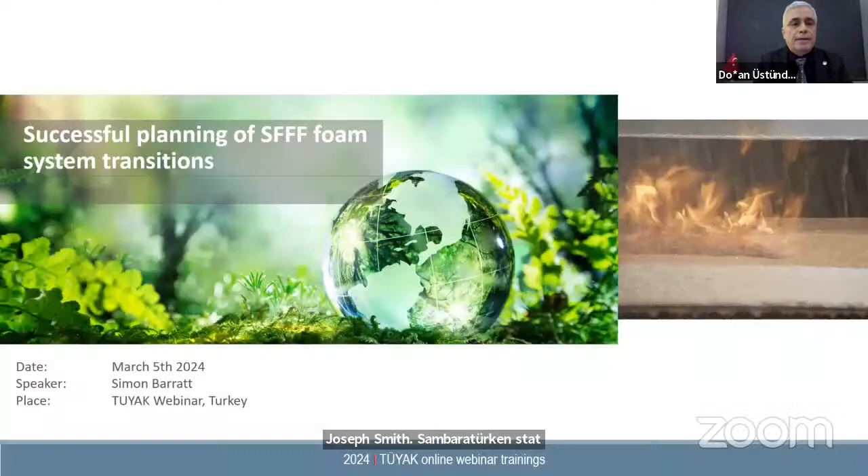Okay, thank you. Good afternoon, everybody. It's good to be here to speak to you today. For those of you at the TUYAK conference in November, I spoke in more detail about the background to legislation and PFAS and chemistry.

What I want to do today is move the topic forward a little by talking about how we actually transition systems from fluorinated foam products to fluorine-free. So we're going to have a quick refresher on foam systems, a quick refresher on the background to the PFAS issue, and then we're going to move on to the bulk of the presentation, looking at different components and considerations when transitioning our foam systems.

As a reminder, we're typically using firefighting foam in systems where we protect against the fire and spread of ignitable liquids. Today's presentation will be all about fixed fire protection, so that's pipework, valves, fully installed, as opposed to mobile firefighting with fire brigades.

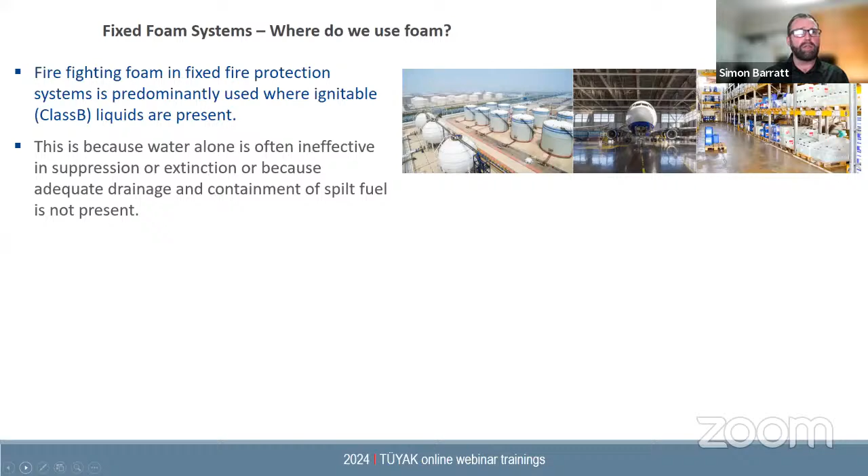We're going to use foam because often water alone is not effective in the protection of these ignitable liquids. Or it might be that we can use less water, less density, by enhancing that water supply with foam. Foam systems are also used where there's no possibility to provide adequate drainage or containment of spilt fuels.

So here is our typical fixed system. We will see this diagram a lot today, with all the different elements of our fire protection system. We will have a water supply, like with a standard deluge or sprinkler system. We then have a foam concentrate reserve, a mixing device which is the proportioner, which mixes water and foam concentrate in a certain ratio to give us a foam solution, which is then distributed throughout the fire protection network to different risks - loading areas, large storage tanks, shelving in a warehouse situation, or storage of ignitable liquids in barrels, for example.

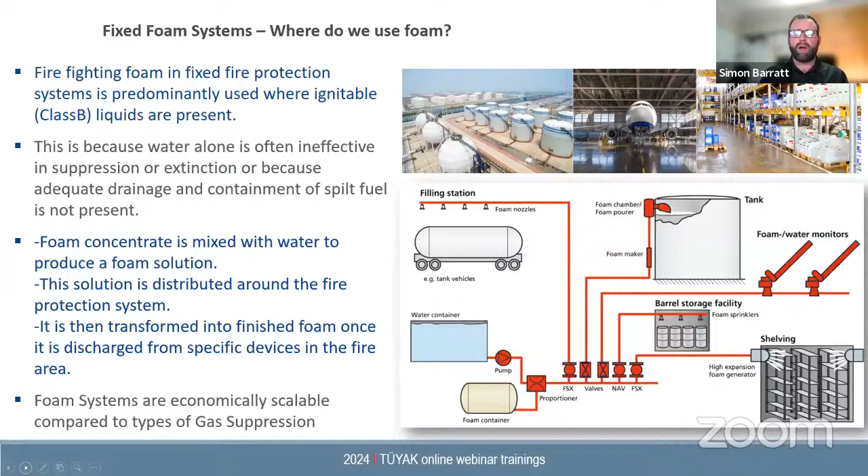One of the benefits of a foam system is that it's quite economically scalable. What I mean by that is we can protect large areas with a foam system without it becoming very cost prohibitive.

Although the foam concentrate itself is a chemical, the fire extinguishing mechanism is purely physical. What we want to do is take away the fuel from that fire triangle. When we have a Class B ignitable liquid fire, it's actually the vapors escaping from the liquid that's on fire, not the liquid itself. So we use the foam as a physical blanket that floats on the surface of these ignitable liquids to stop the vapors from escaping, and thereby we remove the fuel from the fire.

We also have a cooling effect coming from the foam solution, the water temperature. That helps to cool down steel containment that may later give us issues with the foam blanket.

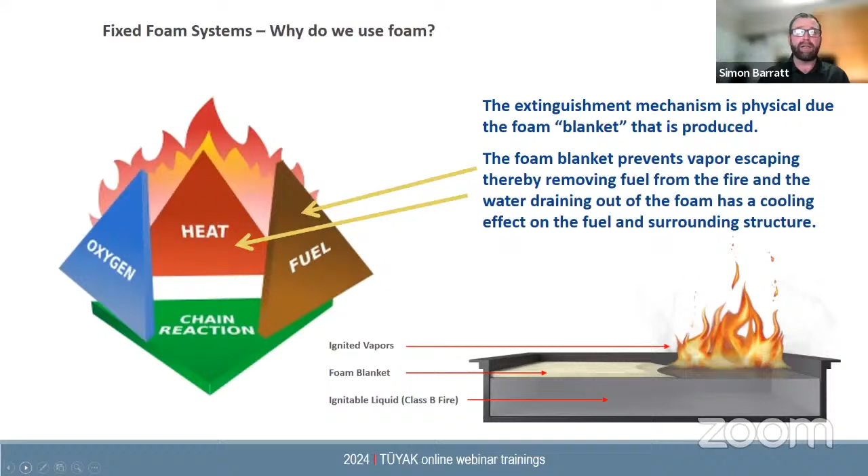So next, a very short video just showing that actual scenario. Here we're discharging foam during an approvals test with a laboratory, and due to the surface tension and the specific gravity of the foam, that is going to float on top of the ignitable liquid. You can see where we've got a foam blanket, we've stopped the vapors from escaping, so we get fire extinguishment.

That was just a very quick background to the main areas where we're using foam, just to set the tone for this presentation. So next, PFAS.

What about the PFAS issue? PFAS is a group of chemicals - per- and polyfluoroalkyl substances. That's a group of thousands of different chemicals used in various types of industry to enhance the performance of a certain product. For example, PFAS are used in food packaging to stop oils and greases escaping, like with a burger wrapper, or in stain-resistant clothing or furniture.

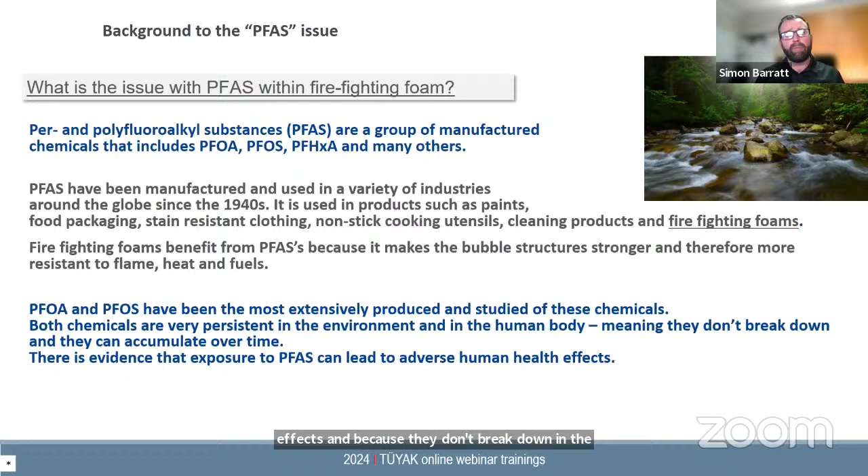These types of PFAS used in foam include PFOA and PFOS. They have been linked with detrimental health effects, and because they don't break down in the atmosphere, they're not biodegradable. They last in the environment for a very long time and are also referred to as forever chemicals. As the planet gets more sustainable and environmentally conscious, we don't want to be using these chemicals anymore.

That's why legislation is increasing. However, we still need to extinguish fires, so we're now working with and developing foams without these PFAS chemicals, called fluorine-free foams, because they don't have this negative environmental impact.

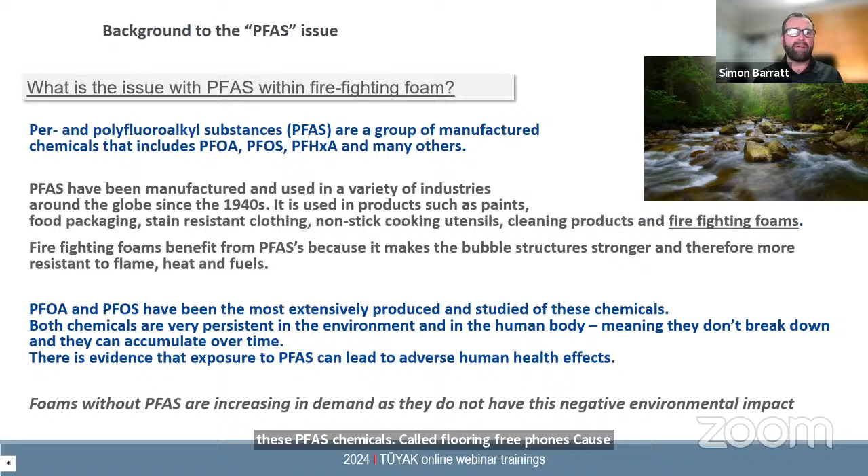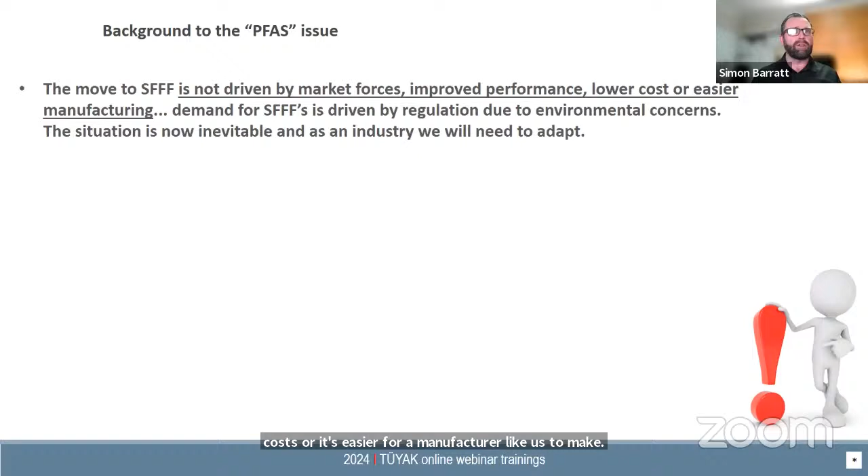This move to SFFFs is not driven by the usual market forces in terms of improved performance, lower costs, or it being easier for a manufacturer like us to make. The reason we make these changes is due to environmental concerns and increasing regulation around the world. I want to make the point that even fluorine-free foams cannot be considered environmentally friendly because they do have an impact on the environment. The key thing to remember is this is a short-term environmental impact rather than a long-term one.

We see different acronyms or references for SFFFs - F3, FFF, fluorine-free, PFAS-free. Whenever you see these marketing words, it all effectively means the same thing: a foam concentrate manufactured without added PFAS chemicals.

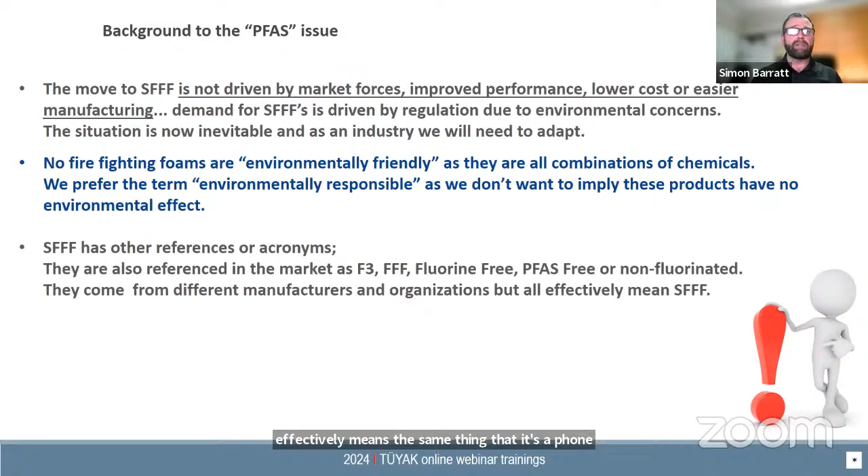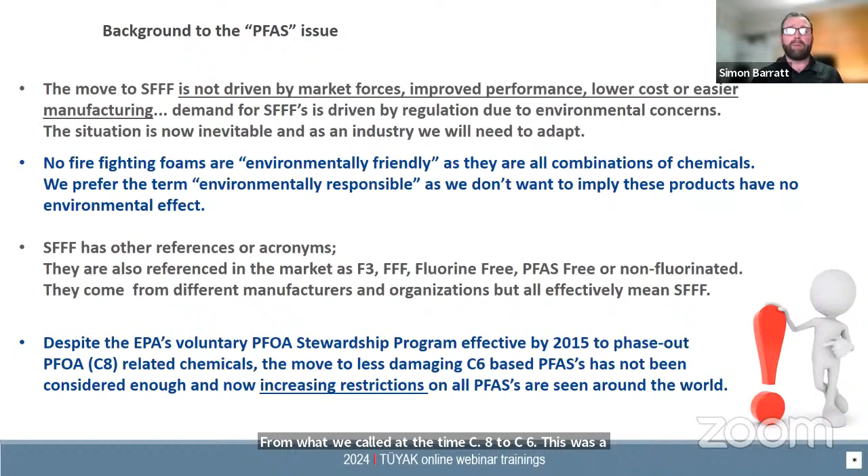For those of you involved in foam systems, you may recall that over the past 10 years the industry already moved types of foam from what we called C8 to C6. This was, if you like, a cleaner type of PFAS, but due to increasing restrictions, even this cleaner type is not considered acceptable anymore. So we've got new systems and modification of existing systems with SFFF, and that's increasing as new legislation comes into play.

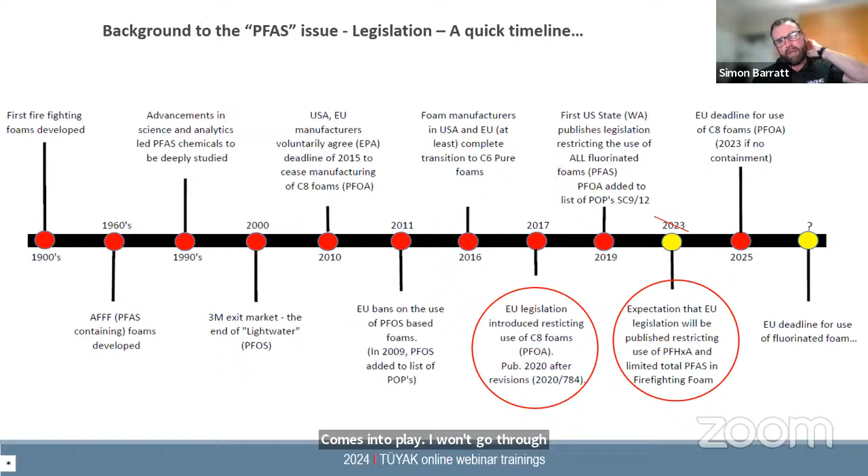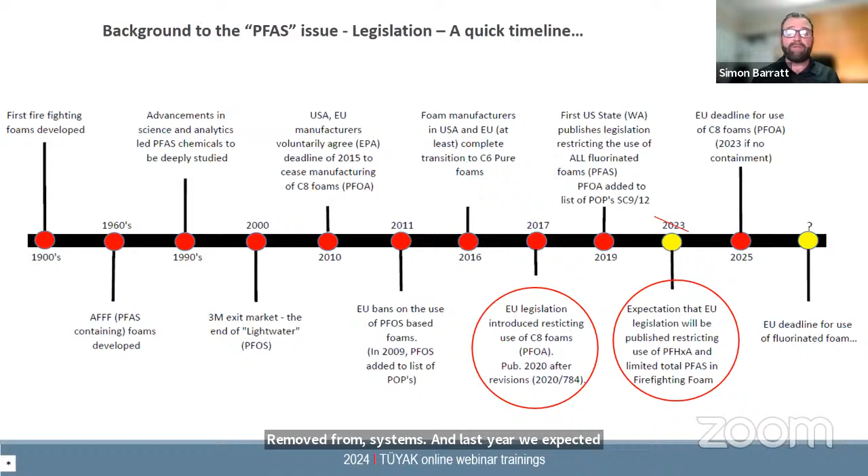I won't go through this long timeline of foam, but the two key elements for us in Europe are the EU's legislation, firstly on C8 foam, which is now live. From January 2023, it could no longer be used if it couldn't be contained, meaning not sold, not used, and it should have been removed from systems. Last year we expected new legislation for PFAS in all firefighting foams, but that's been delayed due to public consultation. We expect that sometime in 2024, with around a 5-year derogation for industry to comply and stop using those types of foam concentrates.

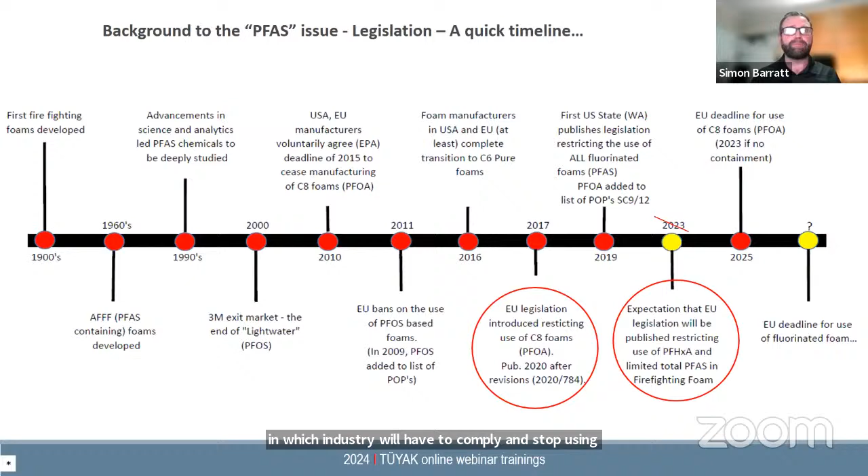So that's the basics on how foam is working, and why we need to change foam. Once we've decided to change our foam system, or to design and install a new foam system with SFFF, synthetic fluorine-free foam, there are several different elements to consider. If it's a new system, it's relatively straightforward - similar to designing a system with fluorinated foams from the past. So we're going to select a design standard.

We're then going to select a product supplier or suppliers. We would then design that system according to the supplier's product densities, approvals, and of course the design standard. And then we're going ahead and installing the new system. I know for the contractors on the webinar today, that's still a very complicated and time-consuming process. But because we have effectively a clean sheet of paper, it's much more straightforward and standard.

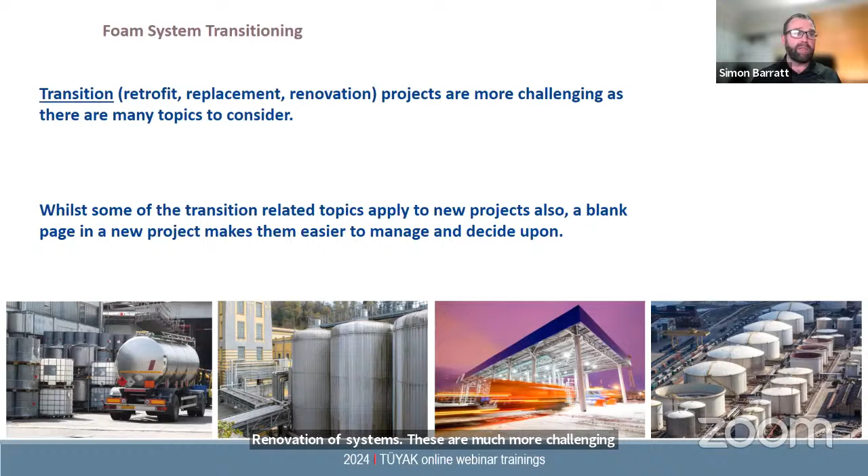A lot of this is what I call an unbudgeted cost. So when the end user installed their fire protection system 5, 10, 15 years ago, they didn't really expect to have to replace it again in the future. So this is often a surprise to end users about actually how many different topics we need to assess. It's not just a case of emptying the tank with one foam and refilling it with fluorine-free foam.

So when we start working with industry, with insurers, with end users, there's some key questions that we like to ask and understand. So shall the transition comply with a specific design standard? I think this is the most important one because our advice has got to be based on that particular design standard. If there's no design standard, I would suggest that's probably a bad idea.

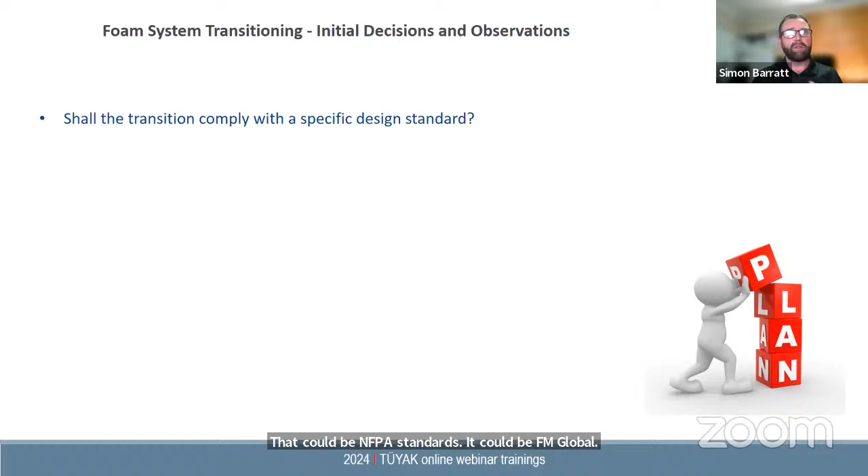And at that stage, a design standard should be adopted. That could be NFPA standards, it could be FM Global risk occupancy standards, or it could be the European standard, for example, or there may be local standards over and above those more international standards.

Is there an insurer or AHJ involved that will have their own requirements? So what we've seen over the past few years is that insurance companies are getting much more involved in requiring their clients to change these systems.

But for example, if an end user discharges a system that's got non-compliant or illegal foam concentrate in it, obviously that could be a risk for the insurance company as well. So we do see insurers involved more and more.

Will the transition use system components tested and certificated together? Well, if you are designing to an NFPA standard, for example, that's a prerequisite that you must use listed or approved equipment that's been fire tested.

Even the European standard will have more requirements related to products tested together. So this is a key one to understand. The reason we ask this question is it will give you a more compliant system, but it will limit the choice and it may increase costs. So at the early stage, we need to understand if this is a requirement of the end user or the insurer.

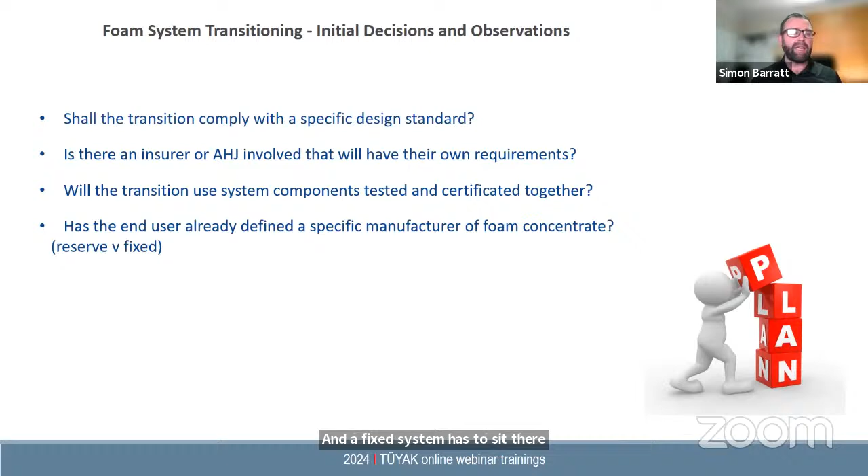But of course, from my point of view, I think there's something very different between a fire brigade and a fixed system. And a fixed system has to sit there and work without any human intervention in case of a fire. So for that reason, it doesn't automatically mean that the foam that works well on the fire truck will also work well in a fixed system.

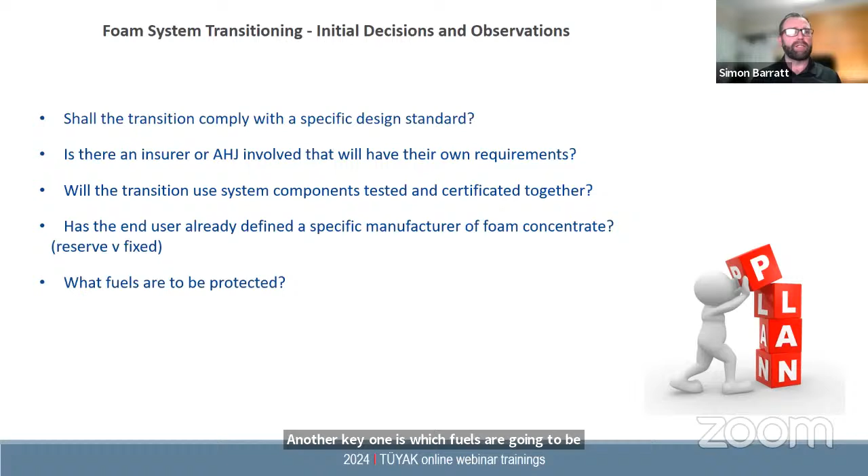Another key one is which fuels are going to be protected. What's the commodity? And we're going to come back onto fuels more later.

One difficulty, I would say, or one question everybody asks, and it's very difficult to give an answer, is should all traces of PFAS be eliminated from the system? If that's the case, and the legislation or the proposed legislation in Europe is unclear on this, and it's very difficult to get a definitive answer.

But if during your transition you don't want to risk any future issues with trace elements of PFAS, then a suitable cleaning or even a partial replacement of pipework might also be required. This is quite a complicated area, and we won't go into that today, the cleaning of systems.

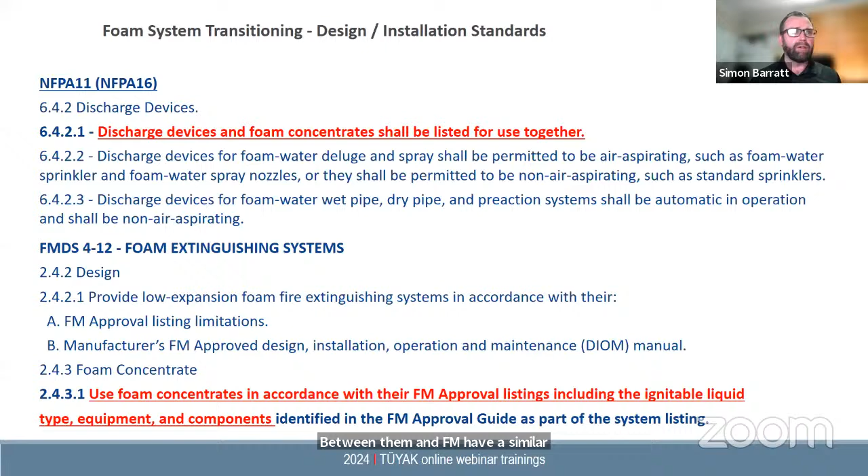Here, quickly in red, we've just got, I mentioned earlier, NFPA 11, for example, the foam standard requires the use of devices and foam concentrates that have been tested together in fire tests, but also compatibility tests between them. And FM have a similar requirement in all of their design standards as well.

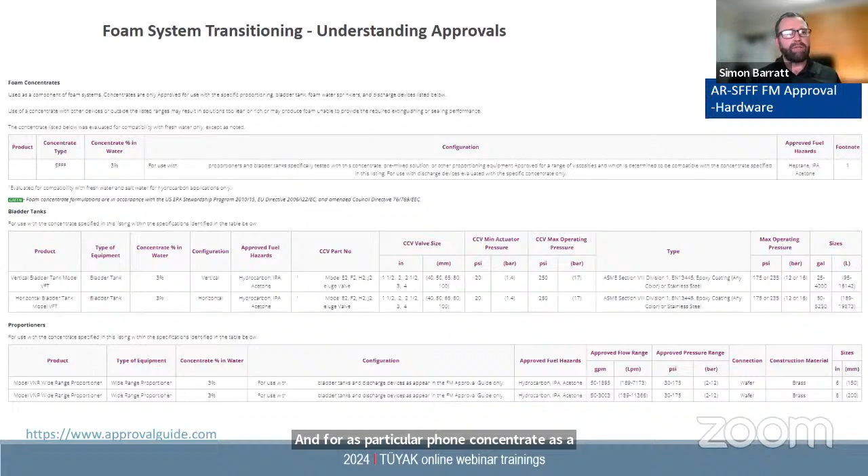This is a slide that often people do not know exists, so I'll take a minute to explain. This is a typical manufacturer's approval, actually an FM approval, for a particular foam concentrate. As a manufacturer, we need to test different proportioning systems and different discharge devices at specified densities. On the FM website and UL's website, you can look up a specific foam concentrate and see all the different pieces of hardware that are approved. Importantly, you'll also see design information there. There's a lot of information in these online approvals, and both FM and UL are free of charge to access.

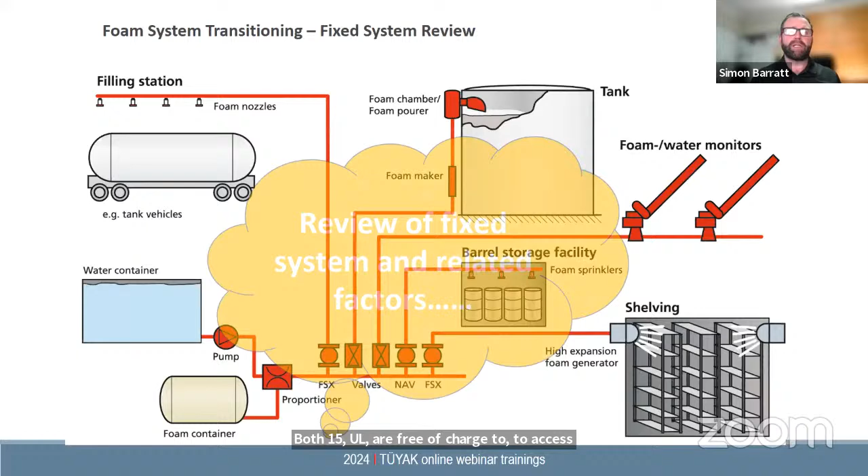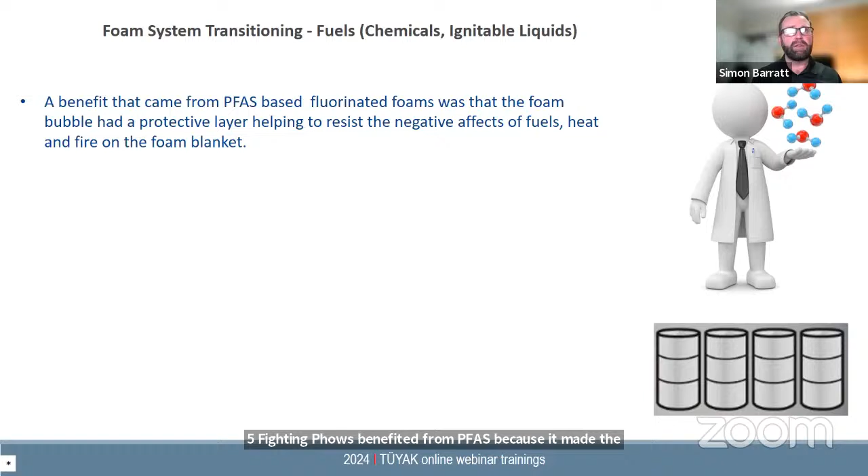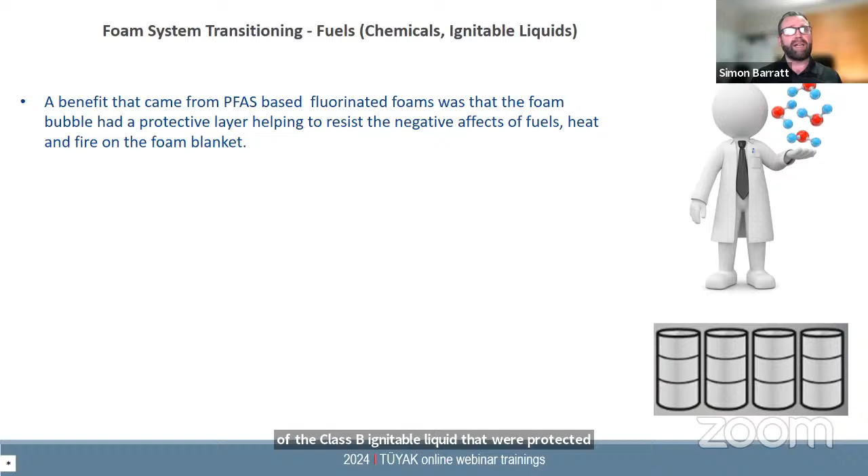Coming back to our system, we're going to go around different parts and focus on individual products and scenarios. I mentioned I would come back to fuels. In my introduction, I explained that firefighting foams benefited from PFAS because it made the bubble structure more resistant and more resilient to heat from the fire and flames, but also to the actual chemical reaction of the Class B ignitable liquid we're protecting. PFAS helped us a lot with that in the past. But with the removal of PFAS, we've had to find other ingredients to maintain fire performance. I have to say that probably 5-6 years ago, there was a difference in fire performance between fluorinated and fluorine-free foams. But now we are seeing products on the market giving very similar performance and passing the same tests that were passed with fluorinated foams in the past.

However, some fuels - and MEK, methyl ethyl ketone, is one of them - are used in a lot of industries for cleaning surfaces before production. It dissolves and destroys resins, adhesives, rubbers, and it also has a destructive effect on firefighting foams as well.

What we had with fluorinated foams was a long history of proven performance and extrapolation, meaning we had data for one scenario that we could use in another scenario with a certain amount of confidence. What we've learned as an industry - and I don't just speak from my company's point of view - is that we shouldn't automatically assume what worked in the past will work in the future. Therefore, there's an unprecedented amount of fire testing happening within our industry from many manufacturers that never happened in the past.

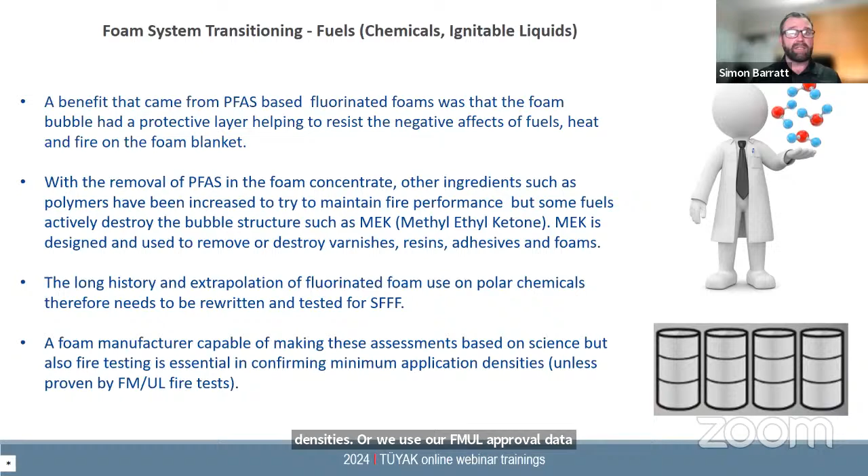I think one of the key things, if you're involved in transitioning a system or if you're a contractor advising your client, is that it's important to work with a foam concentrate manufacturer capable of not only making these assessments based on science, but also backing that up with fire test data. Because what we see is that science tells us one thing and a fire test can tell us something else. So it's a combined picture that we use to give guidance on minimum application densities, or we use our FM/UL approval data to give that density information.

As I said, these SFFs are more sensitive to fuels than in the past, and this is not manufacturer specific. It's happening across many different manufacturers because they've all taken away those fluorinated surfactants without finding a direct replacement that's biodegradable and more environmentally conscious.

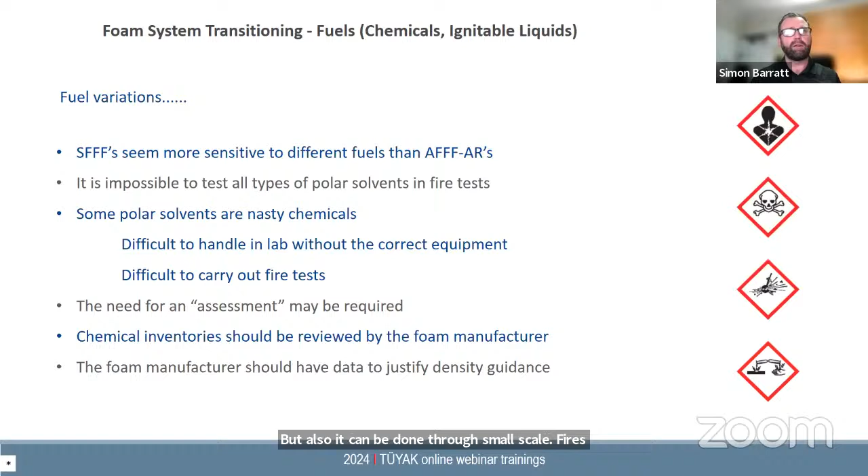So that means we need to ensure we've got a way of performing some kind of test on these chemicals, but some of them cannot be handled outside a laboratory. Some of them we just cannot fire test because they're too dangerous - fire test centers won't allow fires with those products. So we need to find other ways of making an assessment. That can be done through chemical science assessments and evaluations, but also through small scale fires or small scale compatibility tests with the foam.

I'm not going to go through this in detail, but the top slides show a typical fluorine-free foam, SFFF, on MEK. What we're doing here is testing compatibility. This does not by any means replace a fire test, but we're making up a foam solution, shaking it in the beaker you can see in the first slide, and applying that foam blanket. You can see that after 19 seconds, the foam blanket has started to disappear, and this is even without fire. We then apply a second shot of foam after 25 seconds, and by 80 seconds, that has disappeared again. So that particular chemical is designed to destroy the gums and polymers which we happen to use in firefighting foams.

When we look back on a fluorinated foam, you can see at the bottom the timings are quite different. As an equivalent test, we stopped the test at 60 minutes because it was just getting boring. You can see on MEK that foam blanket is still very much intact.

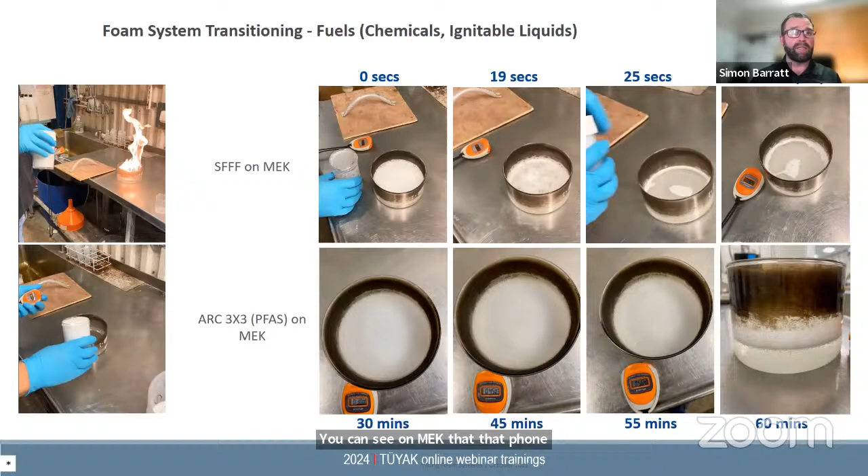Now, what I want to conclude with this is not that SFFs don't work. It's that we need to understand where they're strong and where they're weak. And that only comes through testing.

These problems can be overcome, normally through density. So we just need to increase the density of the foam application to counteract that foam destruction in order to get extinguishment during a fire. It may be that we mix at 6% instead of 3%, so we're using twice the concentrate. That doesn't always work, by the way, so again, lots of research and testing is required here.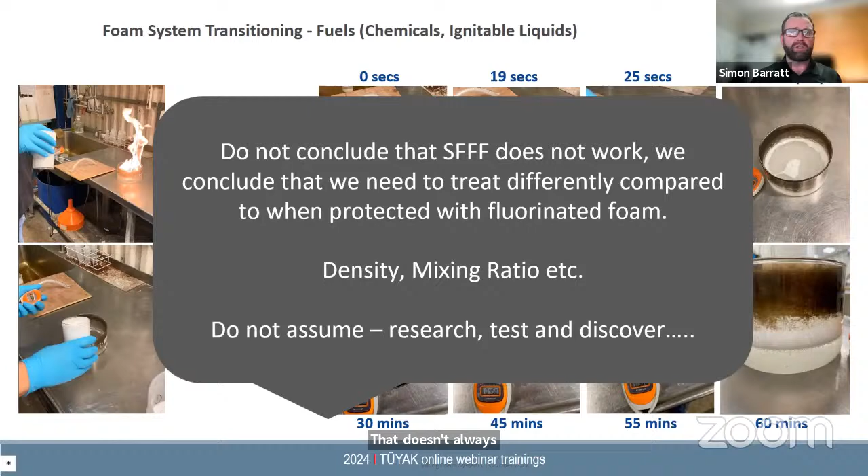Moving on from the fuel, next the discussion normally comes to the foam concentrate. And again, we've got many things to consider. What kind of system is it? Is it fixed or is it a mobile system? What's the fuel? What type of discharge device do we have? In our foam industry, we have a mixture of devices that are made specifically for foam discharge in mind, and then we have products that are not specifically made for foam. They're more designed for water application, but used in foam systems, like a monitor or like a non-aspirated standard sprinkler head.

How will that foam be proportioned? Do we have a proportioning system that's capable of dealing with that foam? Do we need an approval or certification on the foam? Hopefully, yes, but sometimes that's not a requirement. What design density do we need to apply for that foam as per the design density guidelines?

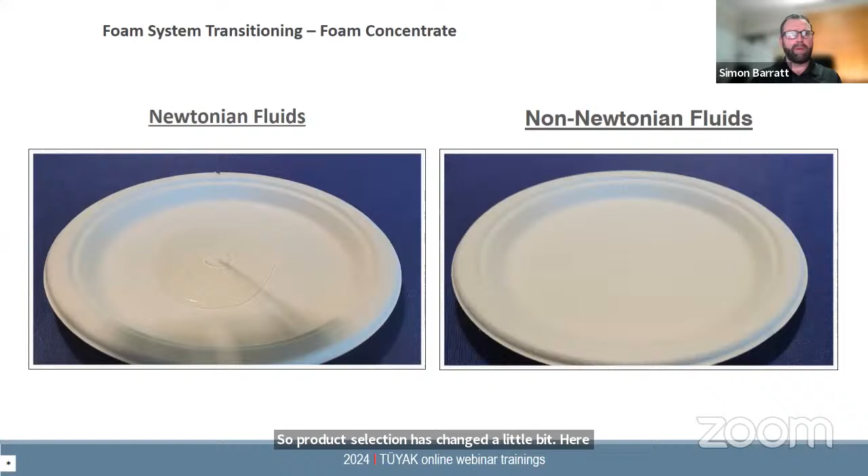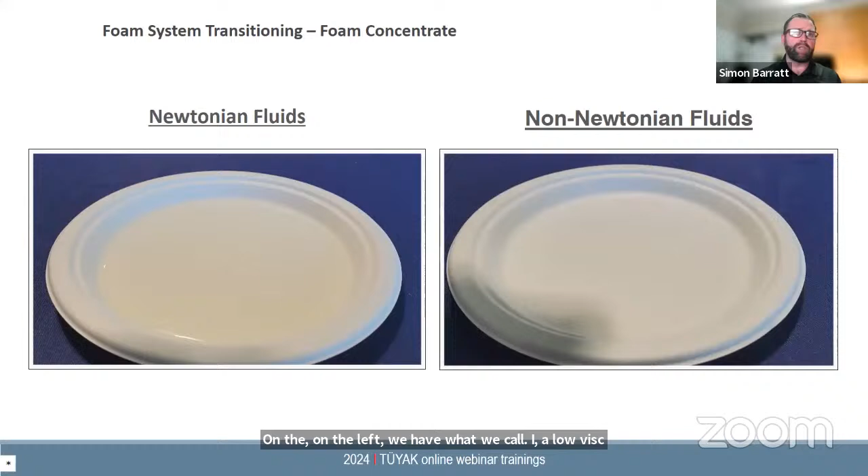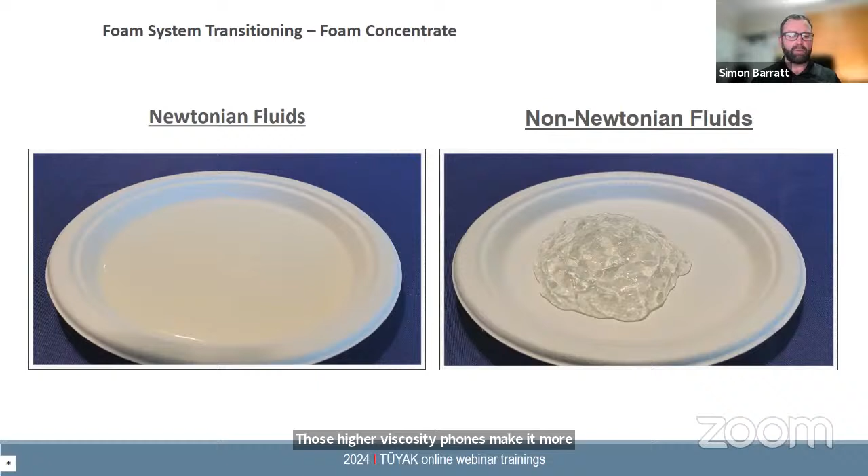Here we've got just an example of what I mentioned about viscosity. On the left, we have what we call a low viscosity or Newtonian type fluid. That was what our traditional AFFFs look like. And then on the right-hand side, there we've got the fluorine-free foam, also called non-Newtonian, which you can see is a much higher viscosity, much thicker. And the reason that's relevant is the proportioning system we use. Those higher viscosity foams make it more challenging, and that's why we need to ask several questions during a transition project.

So moving on from the foam concentrate, we then look at the foam concentrate storage tanks. So this is an atmospheric storage tank, normally used in foam pump eductor systems, or if there's a water-driven proportioning pump, these atmospheric tanks are what's required.

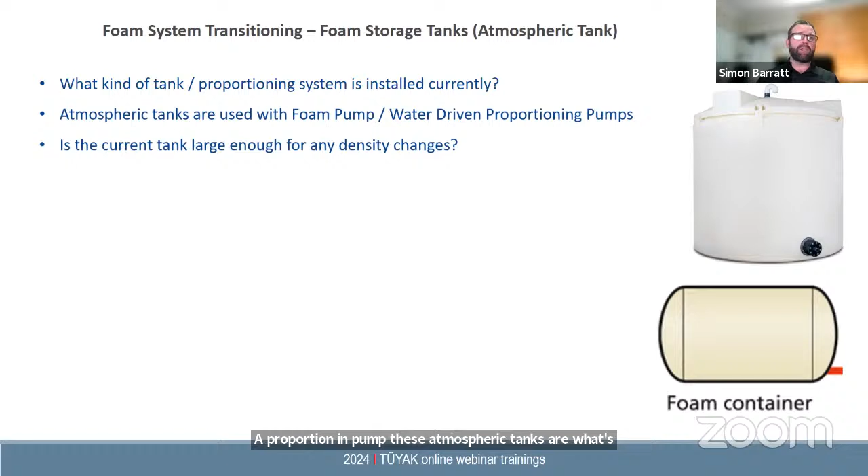If there's been a change in the density, moving from a fluorinated to a fluorine-free, then that tank, you probably can't reuse it because you need a bigger tank anyway. Just as a side issue, I spoke about density changes.

What we're seeing is we're consulting and involved in quite a few projects where the original design was not correct. So there is an increase in density, but it's because the original design was not correct, rather than the products today need more density. So it's not always the change of foam that needs it. It's due to either bad design in the past, or maybe FM or NFPA have increased the densities in the latest revision of their design standards. So there's more than one reason why densities can change.

If the tank is large enough, however, it might be worth assessing if it's kept or not, because what we don't want to do is take a storage tank that had fluorinated foam in, empty it, and then refill with fluorine-free foam, because you will contaminate that fluorine-free foam straight away. So having spent that money on the new foam, that's not so much of a good idea.

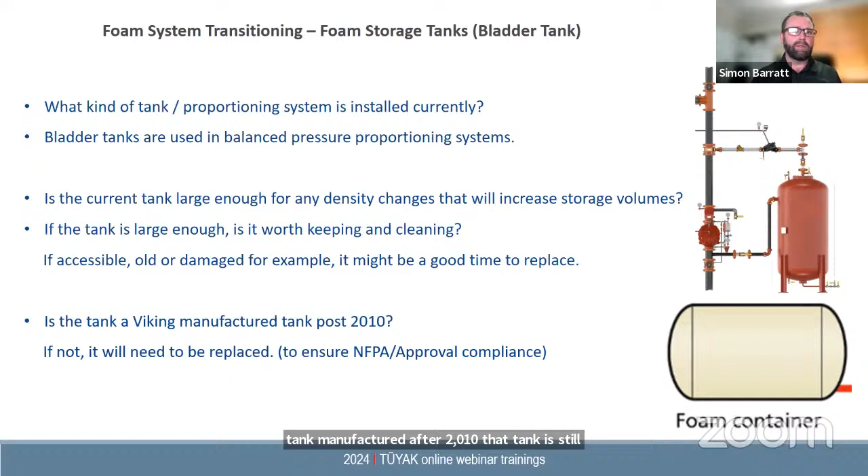It will dose at a certain percentage within the design parameters of that device. So again, if the density doesn't change as part of the transition, then the tank could be reused. If it's accessible, old, or damaged, for example, it could also be a good time to replace it. Speaking from my company's point of view, if it's a tank manufactured after 2010, that tank is still covered under our new fluorine-free approval.

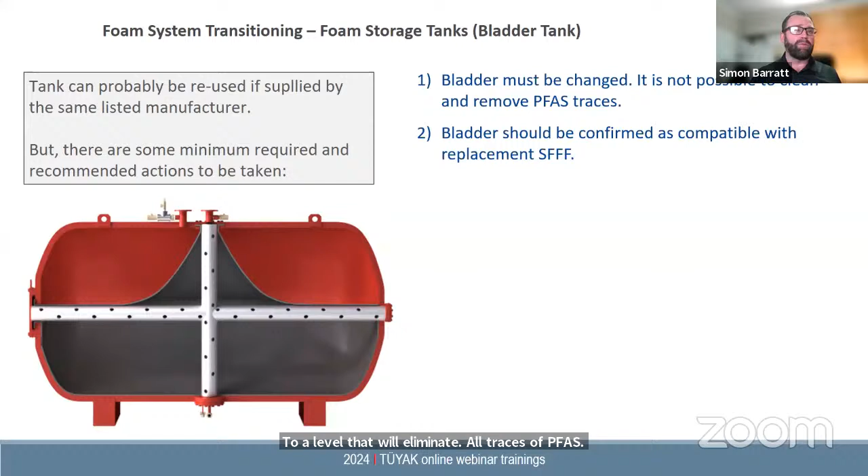So if the density is the same, there is the possibility to reuse the tank. However, what we would require is that the bladder must be changed. There's just no way of cleaning that rubber bladder inside the tank to a level that will eliminate all traces of PFAS. The bladder should be confirmed as compatible with that foam. Again, that's what you get when you select a UL or FM approval. As a manufacturer, we have to pass long-term stability tests between the foam concentrate and the bladder.

Those internal tubes might need to be changed if the end user or the AHJ requires a fully PFAS-free system. Again, any part of the tank that's in contact with the concentrate, so the outlet flanges as well, if they cannot be suitably cleaned, then they would need to be replaced. So you start to see that if it's quite an old tank, it's just going to be easier and probably more cost effective to replace the tank.

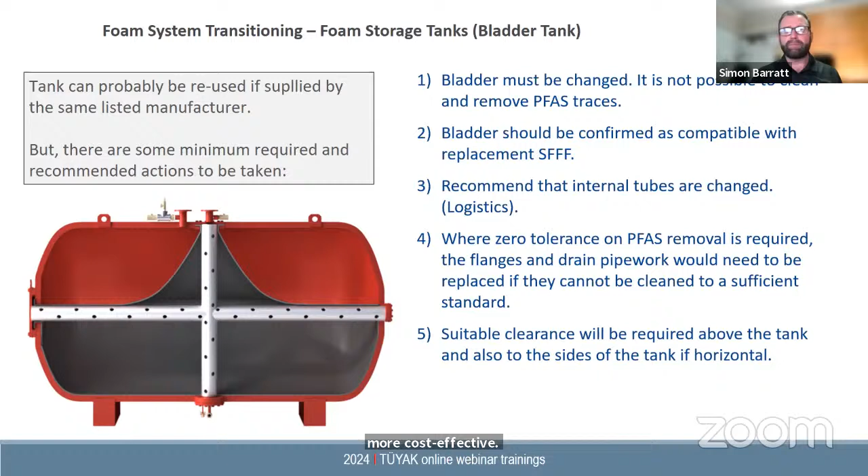Clearances will be required to work on the tank to remove those tubes. So again, if that's not possible, that's where the replacement of the tank might be required.

Moving from the tank to the pipework, because all FM UL system foams are currently higher viscosity. And remember, in the past, an alcohol-resistant AFFF was also higher viscosity, so this is nothing new, but now all foams are higher viscosity in these FM UL systems. I showed you the video earlier of the foam very thick, moving very slowly. That's because it needs to move through this pipework.

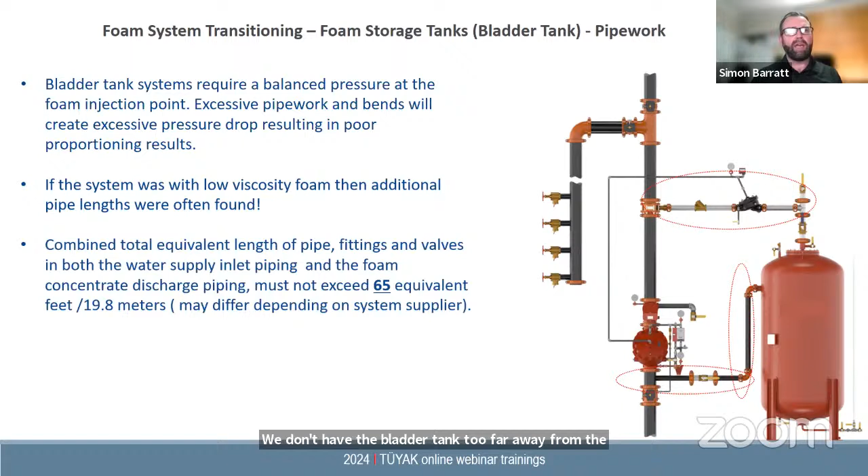So what we need to ensure is that we don't have the bladder tank too far away from the proportioning device. In our technical data page, and it's similar to other manufacturers, we don't want more than 65 equivalent feet or 20 meters equivalent feet of that pipework that's circled. So the pipe to the tank containing water, and then the pipe running away from the tank to the proportioner, that needs to be less than 20 meters.

We state 20 meters because that's what we tested in our FM approval. However, we are running R&D to see if we can increase that recommended distance in the future.

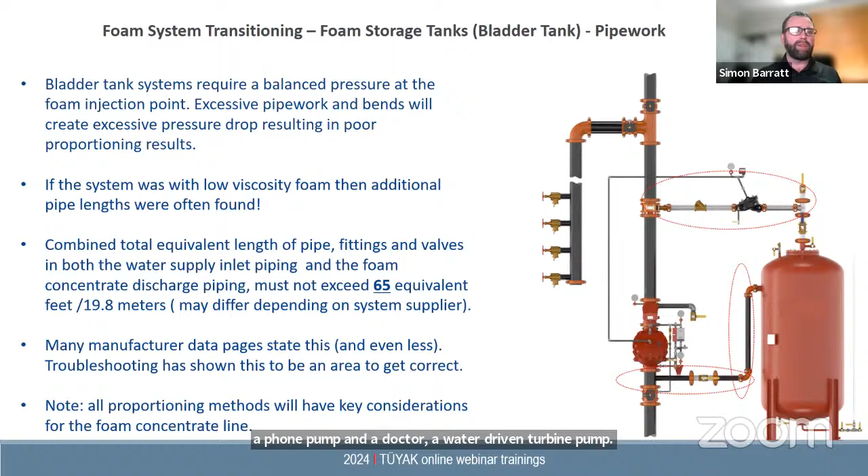One point I would like to make is that all proportioning systems have a critical thing to address: the pipe from the tank to the proportioning device, whether it's a foam pump, an eductor, or a water-driven turbine pump. They all will suffer with excessive pressure loss in that pipe section.

So looking at these different types of proportioners, we would always need to change the proportioner. We can't modify these devices in the field. So at the minimum, a new proportioner would be required. It might be that we go from a standard ratio controller, shown at the top there, to a wide range proportioner to help manage the higher viscosity foams.

Again, that's the kind of advice and guidance that we can give, but it's a reality. In any case, the proportioner would need to be changed to be compliant with design standards and most insurers' requirements. We'd need to check if the density changes, then if we've got a higher flow rate, is the size of the riser still adequate as well? So there might be some pipework changes required there.

Again, looking at a typical water-driven pump, when we're involved in the transition of these, we need things like serial number. We need very detailed suction line detail. We need to know the minimum and maximum flow rates and the foam concentrate that's intended for use. And then we work with manufacturers of these products to decide whether the existing unit is suitable, if it can be cleaned and made suitable for the new foam, or if a replacement unit is required.

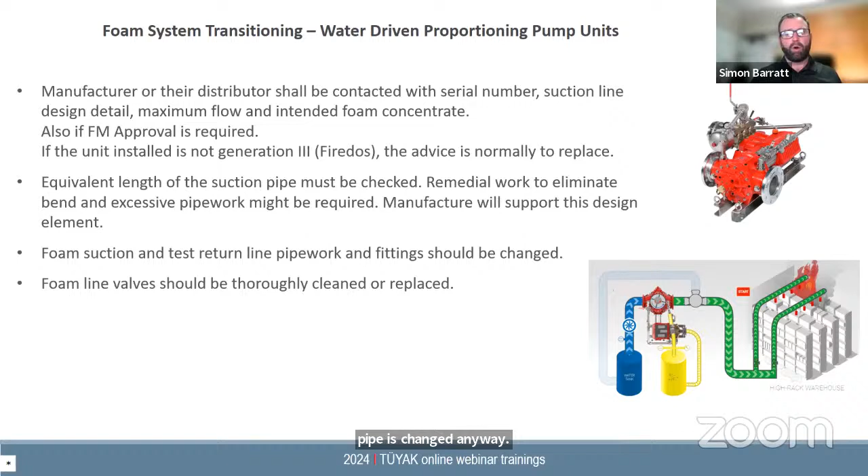The suction pipework and return pipework should be changed. It's contained concentrated PFAS foam for several years, so we would always recommend that the pipe is changed. The valves should also be replaced, or if they can be thoroughly cleaned to eliminate traces of PFAS, then that could be possible. Again, cleaning is probably more expensive than replacing the valve.

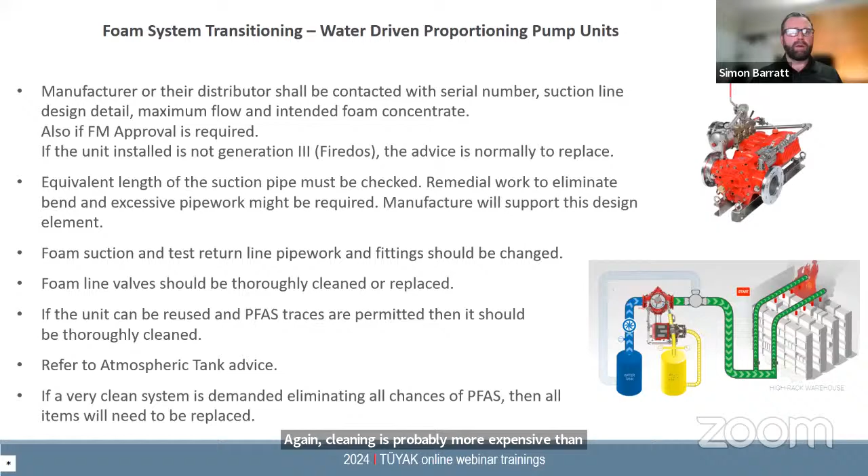Due to time, a foam pumping skid is very much the same as the last slide, where we're looking at what's currently involved, checking if the speed of the driver for the foam pump is suitable, for example, and it's the manufacturer that's going to make the decision on that.

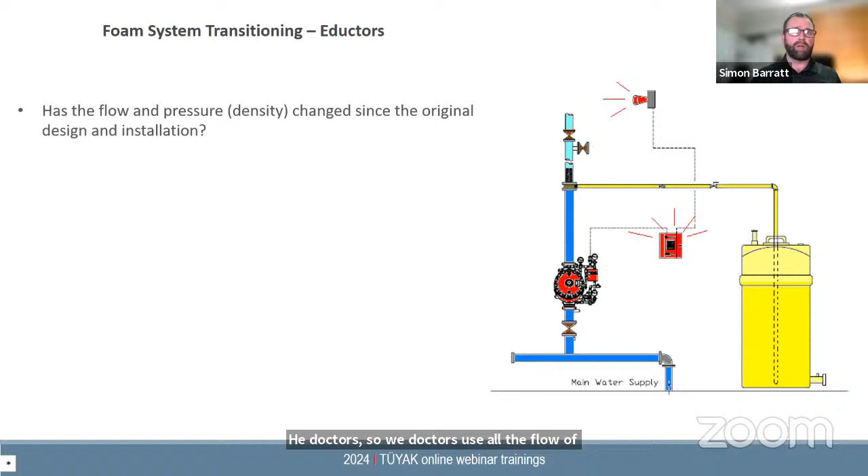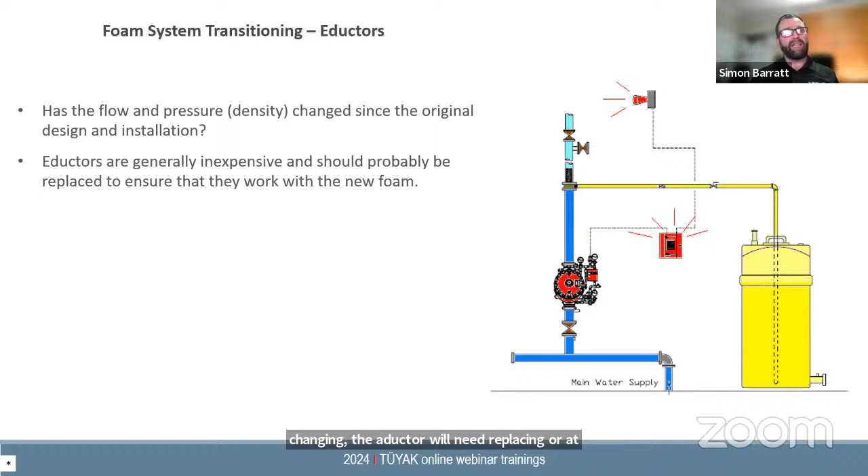Eductors use the flow of water to suck in the foam concentrate. They can only be used on fixed discharge systems, so on deluge systems. Normally they're used as an inexpensive way of inducting foam. But if we have flow and pressure changes as a result of densities changing, the eductor will need replacing, or at the very least, it will need its internal components changed. The foam concentrate line from the tank to the eductor should also be replaced.

Moving on to discharge devices. Non-aspirated sprinklers, I referred to earlier, are designed to be used with water, not specifically foam. When we use non-aspirated sprinklers, it's much more challenging because they don't give us foam expansion, they don't increase the size of the bubbles. But with the right kinds of foam concentrate technology, the two can be brought together to work effectively.

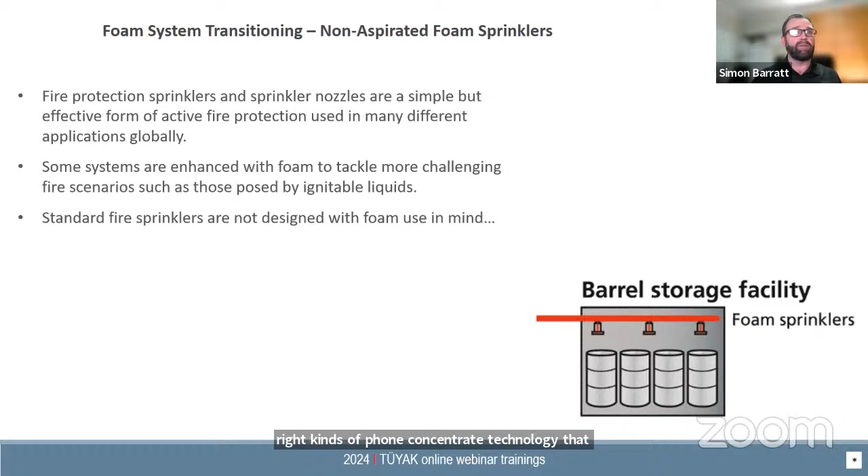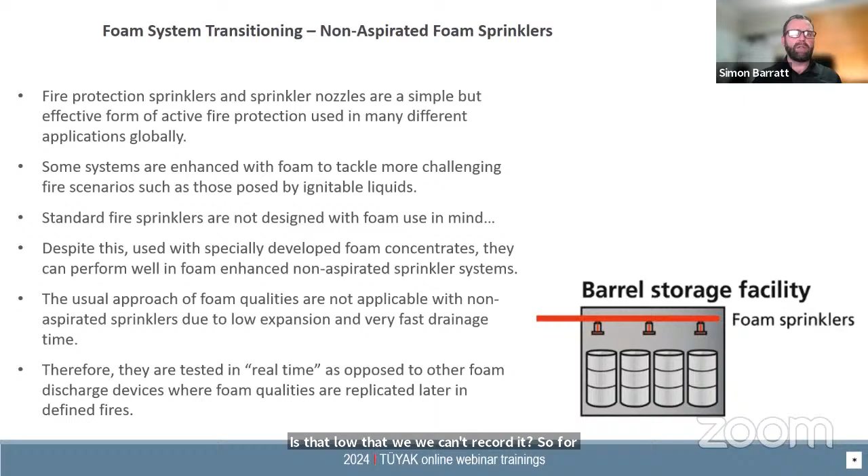We're not going to go into the detail of foam qualities today, but the foam quality coming from a sprinkler is so low that we can't record it. For this reason, this is the only discharge device that we test in real time in fire scenarios, like we see on the photograph here.

When we look at a retrofit project, we're going to want to know the specific sprinkler. Chances are, if it's not a Viking branded sprinkler, it's not going to be tested and approved with the foams that we offer, and vice versa. That will be a common situation.

What density do we now require compared to before? Have we got the right kind of K factors? What pressure is available? The installation height can make a difference. Of course, the fuel and foam type - and it may be that we need to move to specific testing if none of the approved solutions available on the market fit that client's installation.

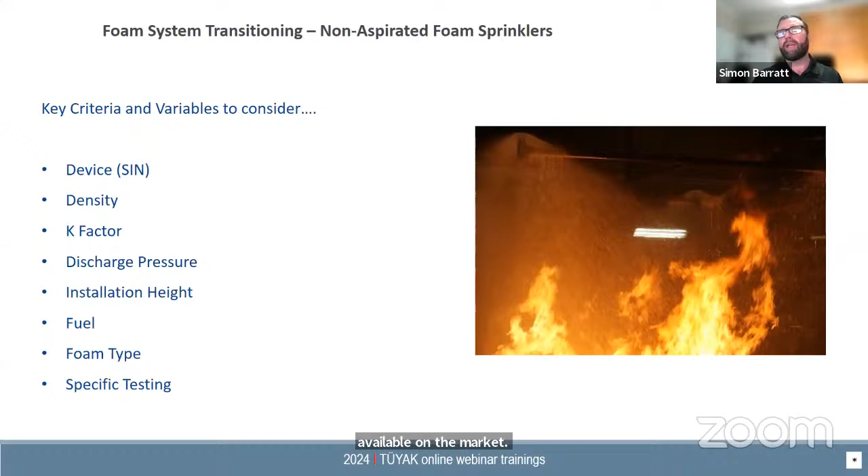Very quickly, I will run through this video - I guess some of you have seen it before. This is how we test sprinklers. We have different commodities in the fire pan, a 4.6 square meter fire pan, containing 230 liters of, in this case, acetone.

And then we've got our non-aspirated sprinklers above, discharging foam. You can see it's not very fluffy, it's quite watery, and that's the typical discharge we get from a non-aspirated sprinkler. I've just moved through this video from a time point of view. So that fire pan, we're applying the foam, we're stopping the vapors from escaping, and eventually we get extinguishment by covering the whole pan with foam.

In this situation, it happened about 3 minutes from ignition, and we get 5 minutes to extinguish the fire. In this case, we had a very strong performance, extinguishing in 3, we had 5, and the good thing is we can carry on applying foam up to 5 minutes.

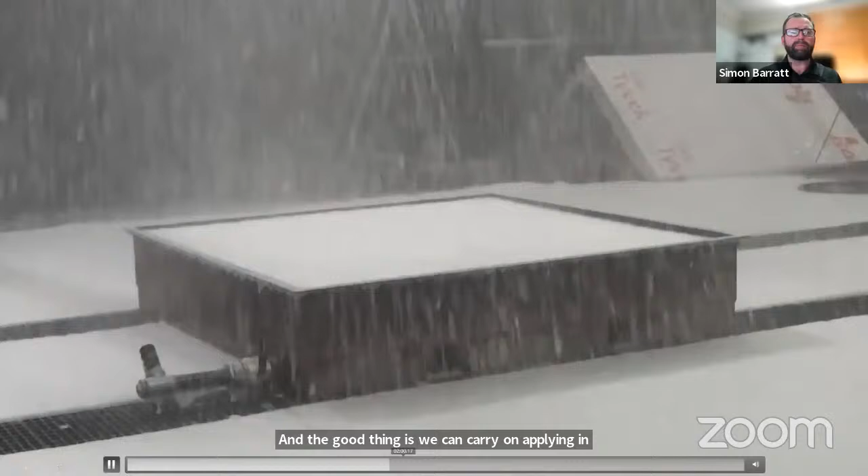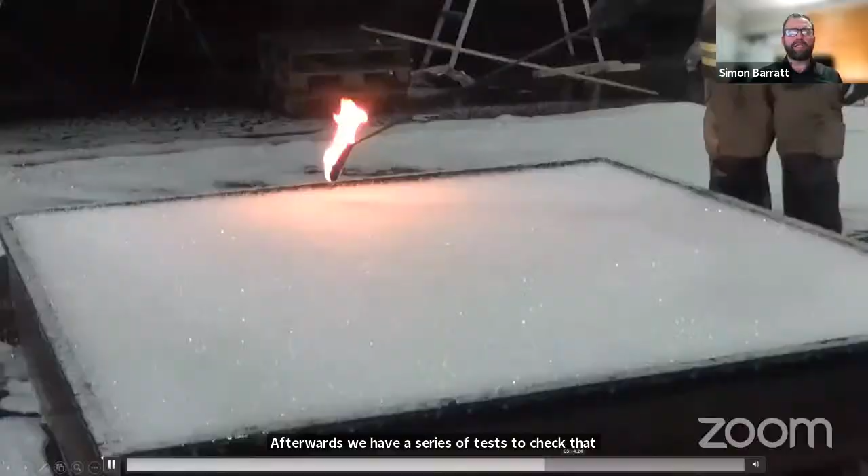Afterwards, we have a series of tests to check that vapors aren't escaping. Then later in the test, we're going to remove our foam blanket and expose the acetone to the atmosphere again. And then we're going to ignite the acetone again and remove this pot. And then we must be able to keep that fire extinguished, or extinguish the fire again, for a further 5 minutes.

So this test in total takes about 26, 27 minutes, and on that video, that was a very good pass. However, what I want to show you, just to explain why there's so much detail when it comes to sprinklers, is that we tested a different kind of K115. It's still a Viking sprinkler, still an upright, the flow rate was the same - every single factor was the same, apart from the design of the deflector.

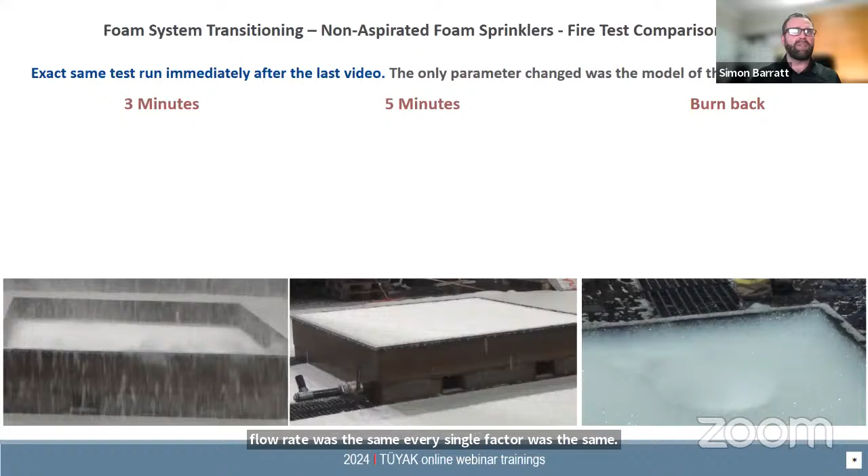After 3 minutes, we've still got a much greater fire. But after 5 minutes, we did eventually extinguish it, getting about 15 seconds of foam discharge before the 5 minutes was up.

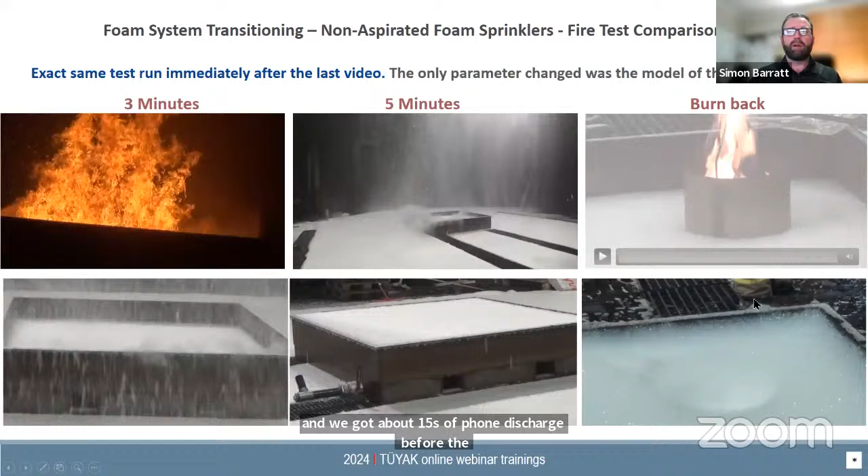So you can see when we went to the burn back this time, we have much less foam blanket. What happened was when we removed the pot, we got a fire spreading around the pan. The thickness of the foam blanket is much less, and as we move around the pan, our foam blanket has disappeared and we've got a fire. So this is an immediate failure.

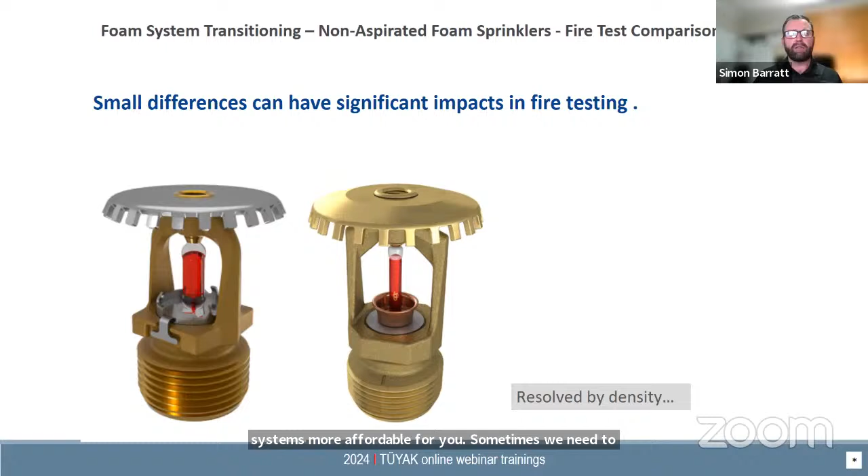That's the difference between the two sprinklers. So sprinkler design working with the foam can have a significant impact. It's not the end of the world, it just means we need to apply more density. As a manufacturer, we're always trying to pass tests at the minimum possible density because that's what makes systems more affordable for you. Sometimes we need to increase the density, and that's the reason why.

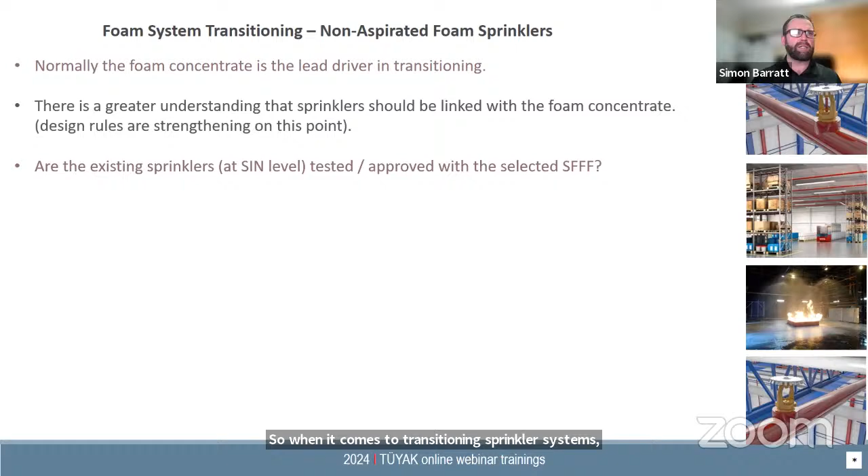So when it comes to transitioning sprinkler systems, the questions we're going to be asking are: what's the existing sprinklers, if they're Viking sprinklers, are they approved with the fuel or representative fuel stored in that risk? And what is the original density, how does it compare to our new approved densities? Like I said earlier, that can be different due to standard changes, not just an inferior fire performance.

What height are the sprinklers installed at? We do see a difference in performance at higher heights. It's more challenging at a higher height, because the foam has got to fall much further through the heat and flames to get to the burning liquid surface.

If it's a commodity that we don't have an approval for, do we as a manufacturer have other test data to prove or to give you a design density for that?

What I would say is that if there's a small amount of sprinklers that can easily be replaced and they're a different manufacturer, then that's something that can easily be done as part of the transition project. If, however, it's a manufacturing process with 1,000 sprinklers in a large manufacturing room, and they can't afford any downtime of that facility, then it may be that we want to fire test with that particular sprinkler and the chosen foam concentrate. So there's some of the pragmatic solutions we've got to giving the right kind of trust and verification of system performance.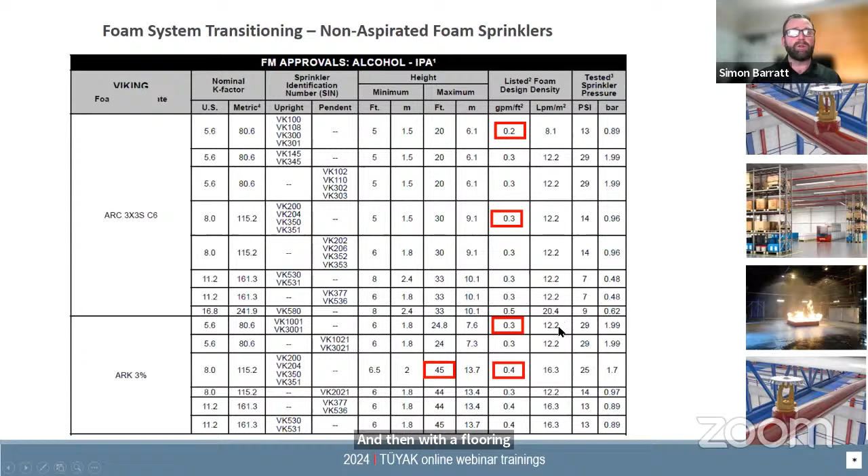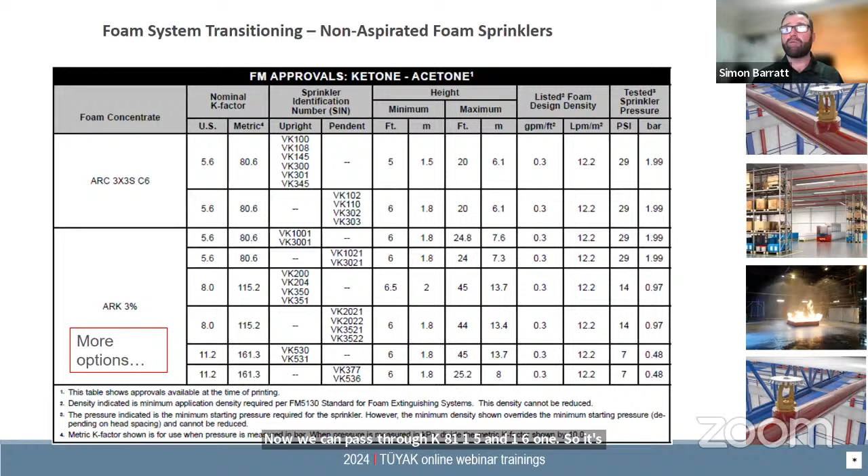Here you see an example on IPA where with a fluorinated foam, for example, we had an 8mm density with a K80 sprinkler. And then with a fluorine-free foam, we've had to increase to 12mm. So this is an example of an increase, but we also have examples where fluorine-free foams are working better. In the past, with our fluorinated foam, we could only pass with K80 sprinklers. Now we can pass with K80, 115 and 161. So it's not always bad news moving to fluorine-free foam from a fire performance point of view.

When we look at other discharge devices like foam makers and foam chambers, again it's normally the foam concentrate that the end user, the insurer, selects based on its approval. So is it FM or has it got a UL listing? Then we look at the discharge devices on site to see if they have any approvals with that particular foam concentrate. Not only that, do the site discharge pressures at the outlet fall into the range of that device as well?

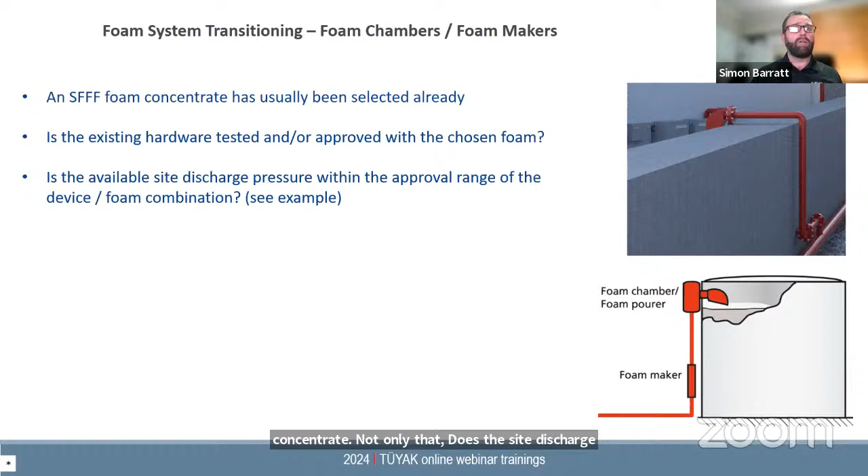What I mean by that is if you look at this typical listing, it's giving you an inlet pressure range. Let me just highlight that. So we've got an inlet pressure range, this one is between 50 and 150 psi. So that's very flexible when it comes to ensuring we've got the right kind of discharge pressure on site.

However, we have some manufacturers that only have one pressure. So is that going to work at 150? Is it going to work at 50? We don't know, they don't know, it's not been tested. So this is the detail of the approvals that's important for you if you're involved in designing and specifying products. These are the things you should be checking to make sure the solutions you recommend are fitting with the design requirements and the client requirements.

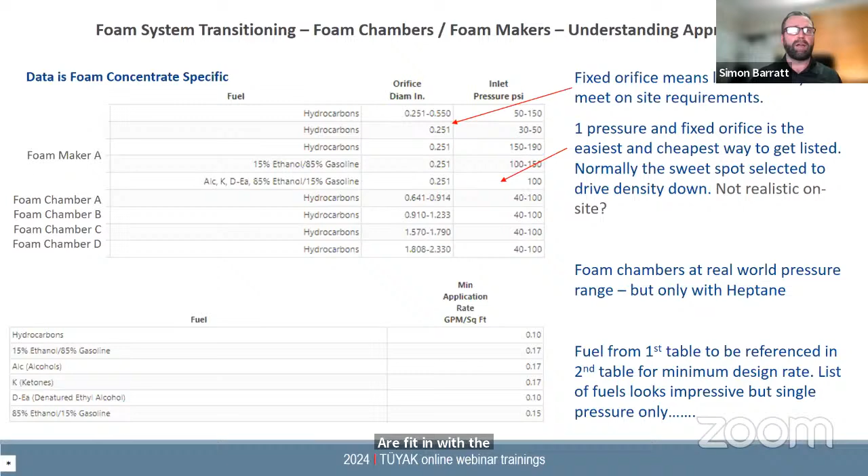I'm just going to skip through the rest of that page. This is quite confusing information, so we've recently enhanced our data page to make it much clearer on flow and pressure, showing where a particular device can be used with a particular fuel and giving design densities as well.

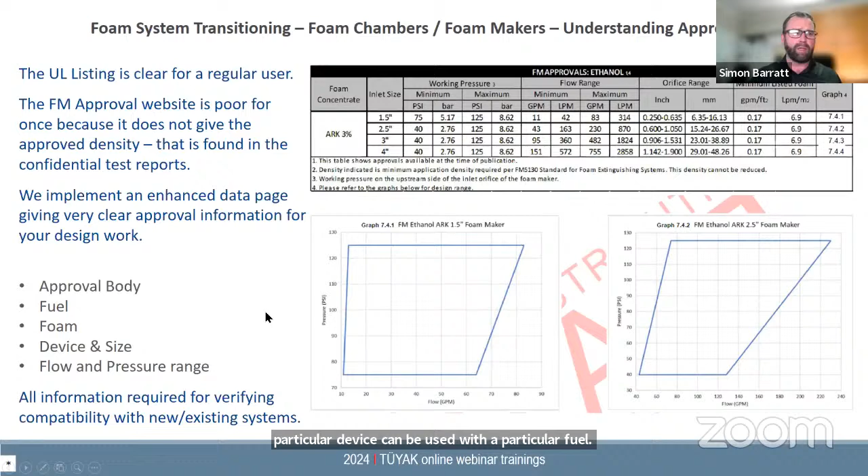Like with the sprinklers, I would suggest that if there's just 3 or 4 foam makers, they get replaced. If there's 2 or 3 foam chambers and they can be replaced, take the opportunity to get something correct. If there's hundreds of these devices, then maybe it's cheaper as a pragmatic transition project to run specific testing with what they have on site with the new foam. Again, we ask a series of questions, and these are the things we recommend sometimes.

This level of diligence or attention is required. It always has been, but now the safety factors that we have with fluorinated foams, I've said they're passing the same test as fluorinated, but the pass-fail mark is generally more prevalent. So we need to make sure we use approved products, but also use them in line with their design approval.

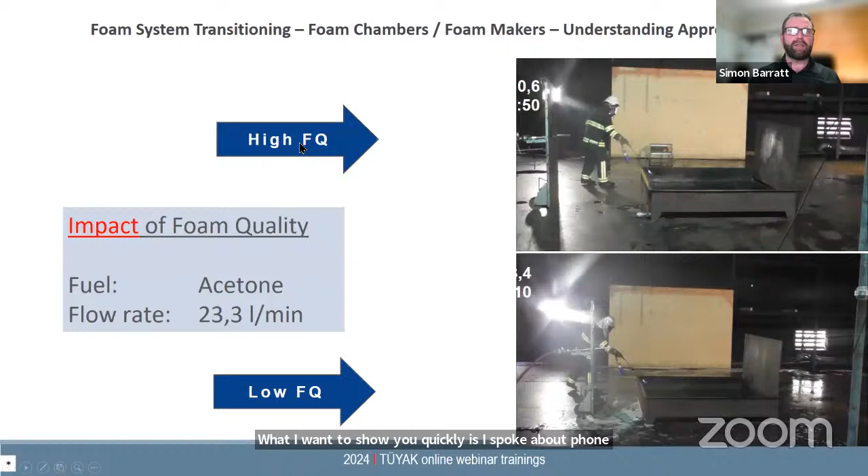What I want to show you quickly is about foam qualities - this is basically expansion and drainage. I'll just play the videos while I'm talking. What we've got here is a fire test to qualify a foam maker or foam chamber. The top video is taken with foam produced at 75 psi, and the bottom video is using a foam quality produced at 40 psi. So what we've got at the top is a much more expanded foam, and you can see already in the video that we start to control that fire.

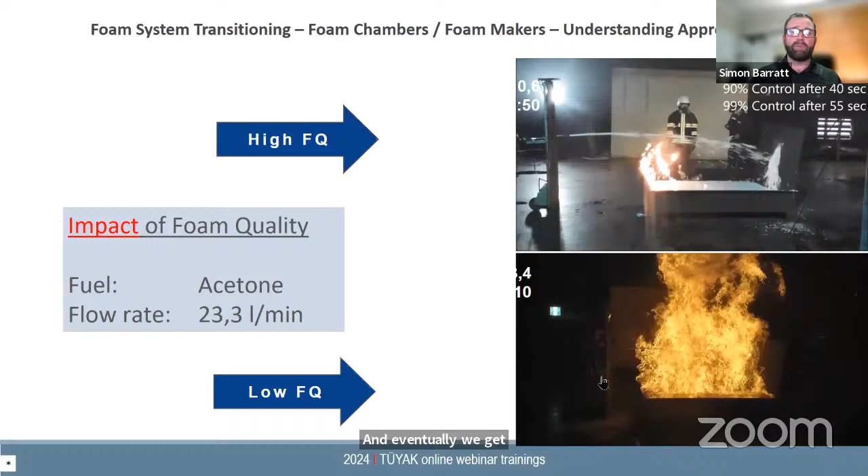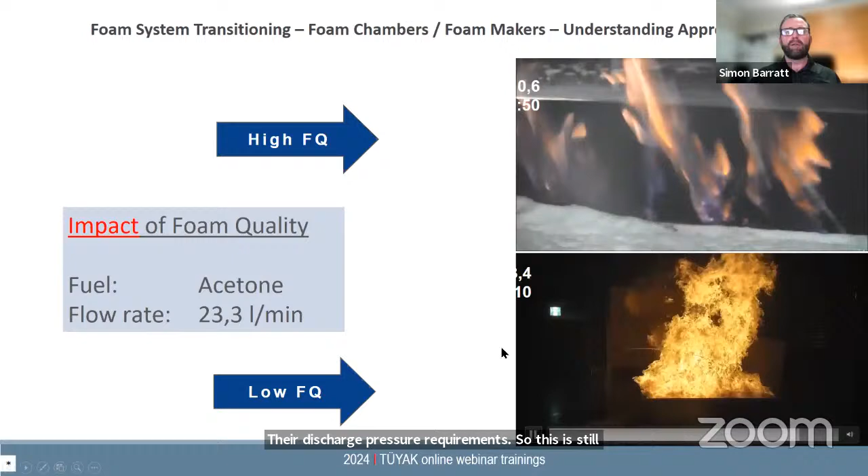I'll just move it forward a little from a time point of view. So again, we're now controlling the fire on the top video, and eventually we get extinguishment. In the bottom video, we didn't even get control. This is the same test, same fuel, same density, but we're just using a different expansion of foam. That's why it's so important to not only use approved products, but use them in line with their approval - the discharge pressure requirements. This is still an FMUL approved foam at the bottom, but because we had too low expansion, that foam blanket did not work.

Monitors we are seeing a lot in transition projects. Generally speaking, as manufacturers, we don't test so much with monitors and foam, and it's because it's very expensive, but there's a very high degree of variables. We can have different angles of the monitor, we can have a full jet, we can have a fog, and it just makes testing very expensive.

What I would say is that if you're looking to select products, obviously look at UL, FM, and ensure that there's a certain amount of topside data with those devices. If they've got it with monitors as well, all the better. I know there's at least 2 manufacturers that have got fluorine-free foams UL listed, for example.

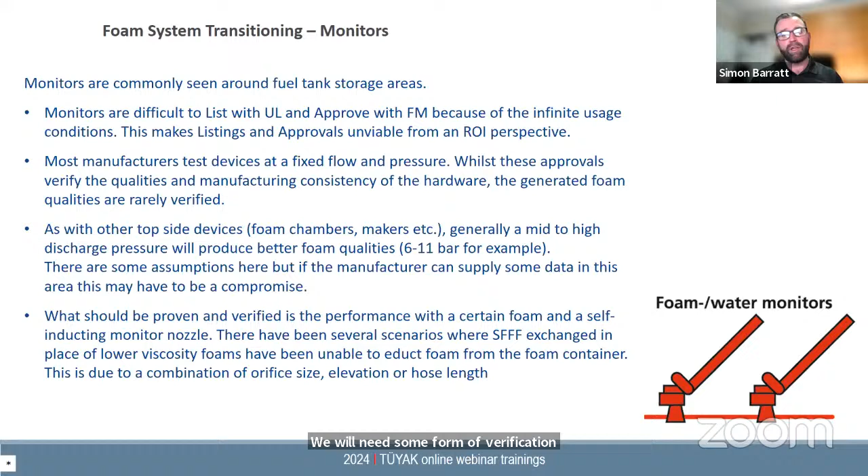What I would say is that if you're working on a project that's using a self-inducting nozzle - this is a monitor that sucks the foam up from a local foam reserve - firstly, I don't think it's the best solution anyway, but that aside, the original nozzle configuration and orifice will need to be checked, because if we're using a different viscosity of foam, perhaps the hose going to the foam container can't be as long. We will need some form of verification that the monitor can work with the new foam concentrate.

And of course, when it comes to the disposal of foam, we need to ensure that that is dealt with through waste treatment authorities. That just can't be thrown down the drain. No surprise, but it's getting more and more expensive to dispose of PFAS-based foam. The only way to really do that is through high temperature incineration. So that's another consideration to make.

I have skipped through lots of other discharge devices because we don't have so long today, but that's us going around the system. From our point of view, we get involved not really as a consultant, but just offering guidance about the products that the client has on site today and what challenges may be faced when making that system both compliant but also legally PFAS free as well.

I've got several case studies, but I'm just going to use one today. This was a project we came across where the customer complained that the proportioner no longer worked. What we discovered was they'd emptied the tank of AFFF and replaced it with a fluorine-free foam, and they did probably everything wrong. They didn't replace the bladder, so they've now got contaminated fluorine-free foam. They didn't clean any of the pipe work. They didn't change the proportioner. And worst of all, they didn't select an FM approved foam - and this is an FM global site. So they've now got to replace and do all that work again.

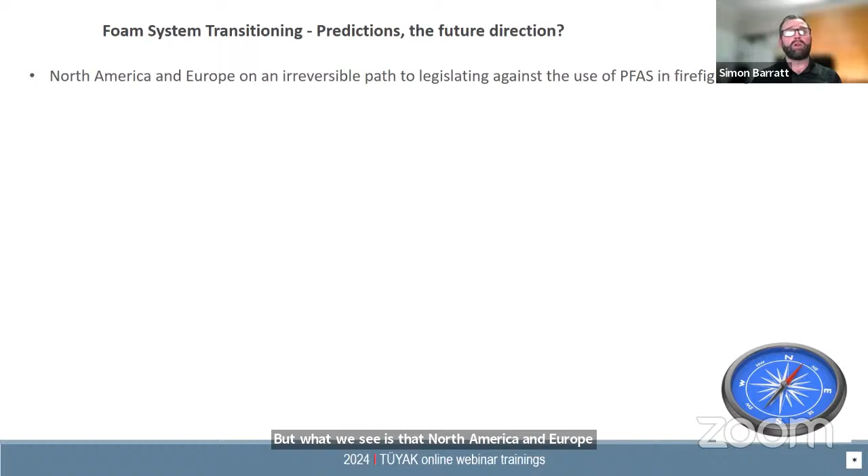So my whole presentation is to just ensure that you don't make these similar mistakes. So when we look at the overall picture, trends and predictions for the future - this is my personal opinion, not those of industry or my employer - what we see is that North America and Europe are very much on a path to legislating against PFAS in firefighting foams. This is already leading to many fluorine-free foam systems being installed. We even see, while projects are ongoing, they're taking the opportunity to work with fluorine-free foams.

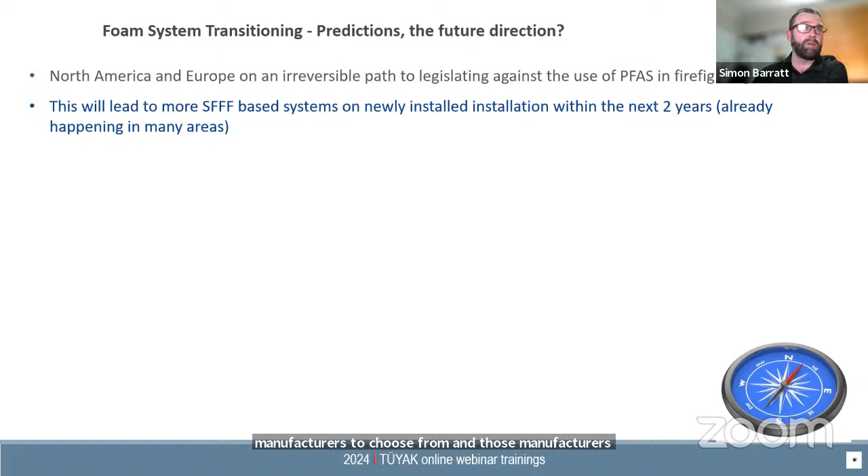This is becoming much easier because there are more manufacturers to choose from, and those manufacturers have more approvals and solutions available. Because of EU legislation, it's likely that by 2028 the use of any type of fluorinated foam will be prohibited. That doesn't mean we can't sell it anymore, it means it cannot be used anymore. The client will always be okay as long as they don't need to use the system, but if they have a fire and there's contamination due to PFAS, that could be an issue for that end user in the future. We see in North America this timeline moving much quicker.

State by state, it's different, and other countries will follow. So I've spoken about Europe and North America, but the overruling international law is coming from the Stockholm Convention, and almost 200 countries globally are signed up to that. It's part of the Convention on Persistent Organic Pollutants, and PFOA, for example, is now banned. So even if you're not in Europe or North America where there's specific legislation, your government has an obligation under the Stockholm Convention to start to deal with this issue.

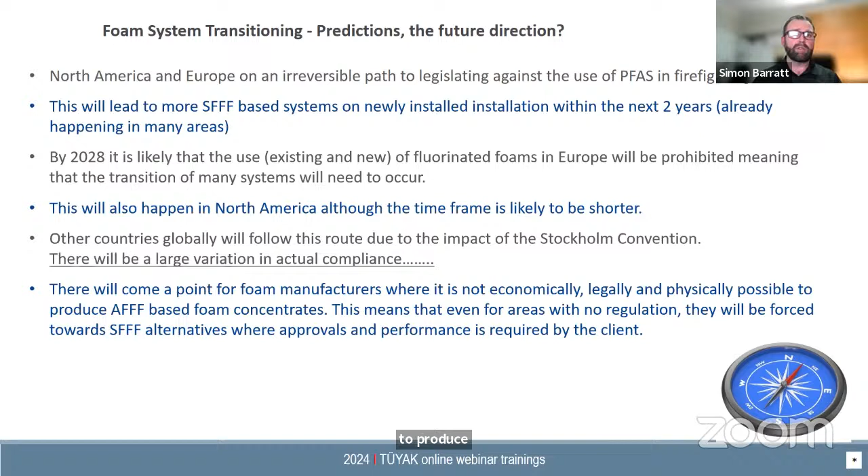Additionally, there'll come a point where foam manufacturers find it's not economically, legally, or physically possible to produce fluorinated type foams. So even without regulation, they will be forced to produce more and more fluorine-free alternatives. Without naming names, the biggest fixed foam manufacturing company in the world has now stopped manufacturing fluorinated foams. Other big companies have also announced that they will stop supplying fluorinated foams. That's because of future risks of litigation, but also because the new fluorine-free foams are now giving very good products with performance similar to what we had before.

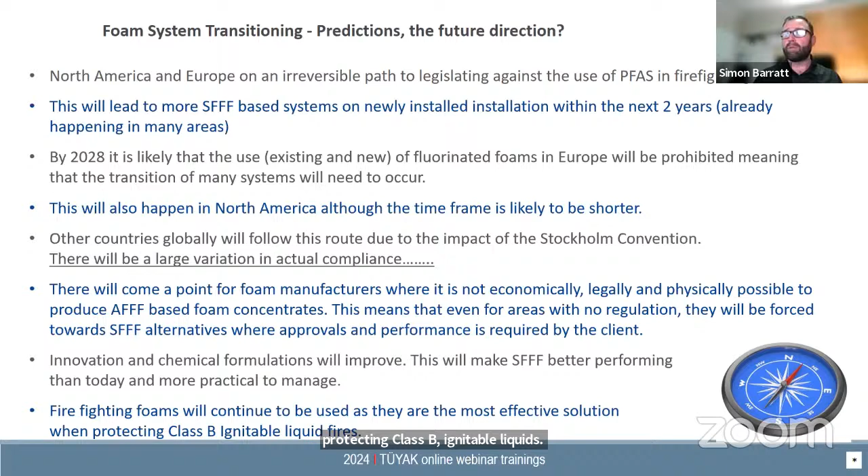And of course, innovation and chemical formulations will continue to improve. I just want to finish by saying that firefighting foams are still the most effective solution when protecting Class B ignitable liquids. So although some end users would prefer not to have foam at all, it is still the only way of protecting certain fires. Okay, so that concludes my presentation today.